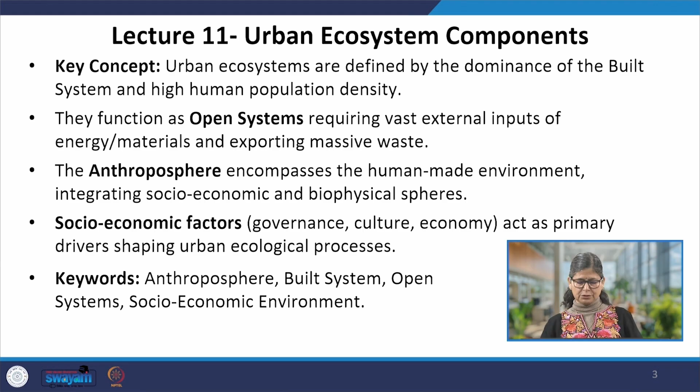Socioeconomic factors we discussed, governance, culture, economy, act as prime drivers shaping the urban ecological processes. Keywords of this lecture were anthroposphere, built system, open system, socioeconomic environment. In the following lecture, urban ecosystem functions and processes, we explored.

Key concepts were urban functions are hybrid, combining natural capital with human-derived assets like technology and infrastructure. Resource import creates an artificial trophic web, decoupling the city from the local primary production. It's a new one. Information flow via digital and social networks acts as the neural network, regulating feedback in the

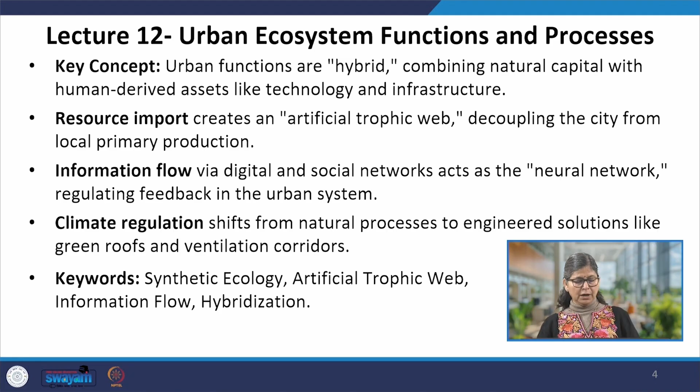urban ecosystem. Climate regulation shifts from natural processes to engineered solutions like green roofs and ventilation corridors. The keywords were synthetic ecology, artificial trophic web, information flow, hybridization. Next lecture was on urban metabolism, which is a very important one.

Its concept is analyzing cities as organisms that consume resources and excrete waste. Abel Wolman in 1965 formalized the concept using an input-output model to quantify urban resource flows. The goal is to shift from a linear metabolism, take, make, waste, to a circular metabolism. Once we understand what is going in the waste, we can recycle and reuse that.

Tools like material flow analysis account for the mass balance of inputs, stocks, and outputs in a city. Urban metabolism, Abel Wolman, material flow analysis, and the circular economy were the keywords for this lecture.

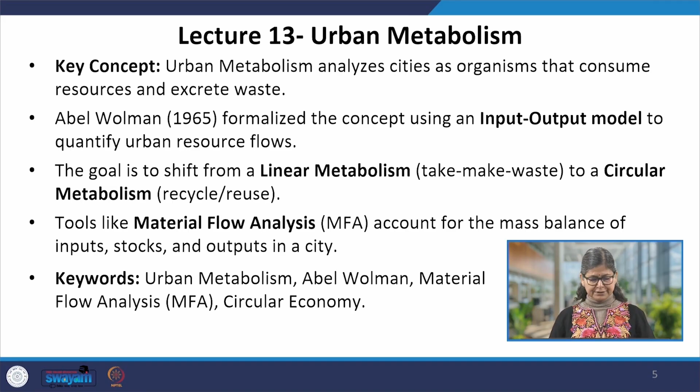Urban ecosystem and water, lecture 14, talked about the key concept of urbanization, which creates an engineered water cycle, and that is fundamentally altering the natural hydrology. Impervious surfaces drastically reduce infiltration and increase surface runoff, leading to flashy hydrographs. We discussed those hydrographs as well.

The urban stream syndrome describes the ecological degradation of waterways due to increased runoff velocity and pollution. First flush phenomena washes concentrated pollutants, oil, metals, etc. from the surfaces into water bodies during the storm. Keywords chosen were urban hydrograph, impervious surfaces, urban stream syndrome, first flush.

Lecture 15, the last lecture of that particular module, was demonstration of urban ecosystem and water. Achieving water security requires non-conventional resources and an integrated urban water management approach. That was the key concept. We discussed ice stupas in Ladakh, fog harvesting, Singapore's NEWater. And the key words were desalination, NEWater, fog harvesting, ice stupas, and definitely integrated urban water management.

So today we'll be covering the case study on BGI solutions, and for that the flow will be from concept to capability, global benchmarks, the Indian context, synthesis and scaling. The 5 capabilities: measure, sensing, which we discussed in lecture 53. Regenerate, eco-engineering. Design wisely, best management practices. Manage risk, planning, and scale responsibly, which we will be discussing in this lecture.

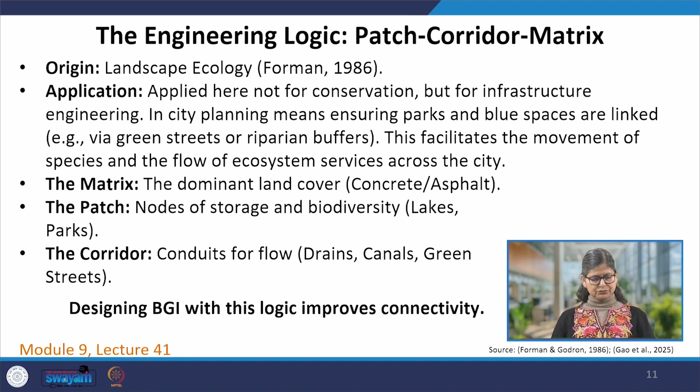That facilitates the movement of species and the flow of ecosystem services across the city. The matrix, the dominant land cover; the patch, nodes of storage and biodiversity; and the corridor, conduits of flow: drains, canals, green streets. So, designing BGI with this logic improves connectivity. We discussed it, introduced it also in lecture 41.

Redefining PCM in the context of the future urban ecosystem, these elements take on specific engineering definitions. The matrix, the background fabric that controls flows of energy and matter. Urban reality: the matrix is hostile, impervious, a heat island generator. So, how to really change that matrix? The patches, the non-linear surfaces that differ from the surrounding matrix. In a BGI network, patches function as nodes or capacitors.

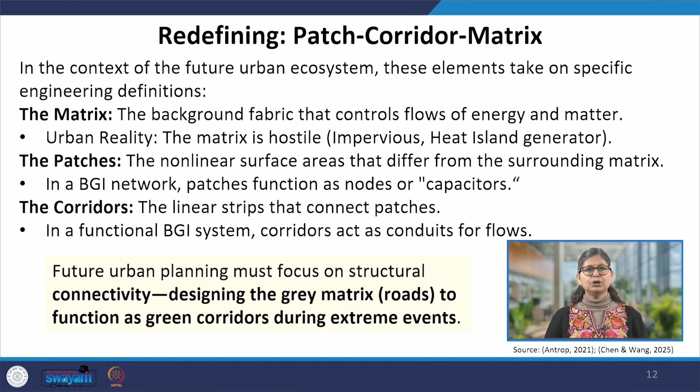The corridors, the linear strips that connect patches. In a functional BGI system, corridors act as conduits for flows. Future urban planning must focus on structural connectivity, designing the grey matrix like roads to function as green corridors during extreme events. Hybrid grey-green structure: the false binary is it's either grey or green. No, it has to be grey and green.

Complementarity. The green manages high frequency, low intensity events, 90% of the rain events, and polishes the water quality, whereas the grey will manage the low frequency, high intensity events, cloudburst-like things, and conveys the volume. The performance metrics has to be different.

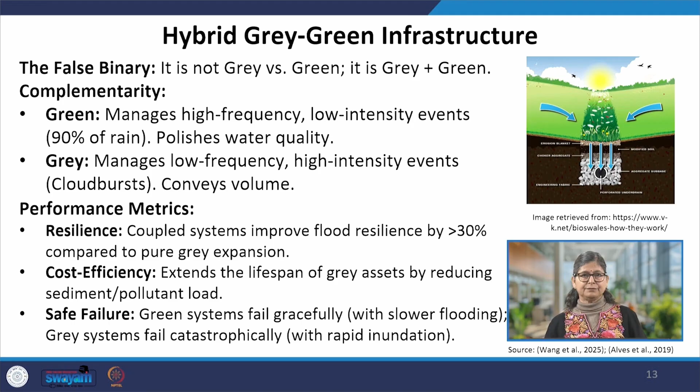Resilience. Coupled systems improve flood resilience by more than 30% compared to pure grey expansion. Cost efficiency: it extends the lifespan of grey assets by reducing sediment or pollutant load. Safe failure: green systems fail gracefully with slower flooding, whereas grey systems will fail catastrophically with rapid inundation. Global benchmarks: operationalizing this resilience at scale.

Copenhagen, we will see very good examples here, the hydraulic city. The triggering event was in July 2011, a cloudburst, 1000-year storm event, 150 mm rain in 2 hours. The existing grey infrastructure, a combined sewer system designed for historical rainfall patterns, was overwhelmed. Sewage-contaminated water flooded cellars and streets, causing over €1 billion in direct damages.

This event was the tipping point that forced the utility and the municipality to acknowledge that the pipe-bound paradigm was fiscally and physically impossible to scale to meet climate change projections. So, what have they brought? Technical solutions: cloudburst boulevard. The concept is to redesign roads to act as V-profile canals during extreme rain. Now the road network, the matrix, functions as a surface hydraulic channel.

You just see now the crown is here. But what is being advised now is, okay, let us go for a channel. The dip is here. So high curbs, reversed crown profile, channels water away from basements to the harbor or lakes. So this entire road will actually act like a drain.

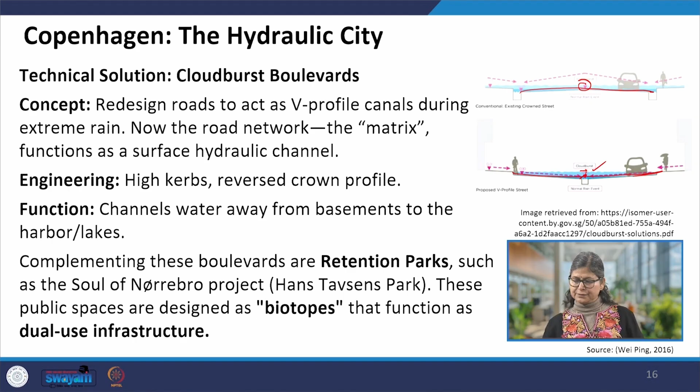Complementing these boulevards are retention parks such as the Soul of Nørrebro project and Hans Tavsens Park. These public spaces are designed as biotopes that function as dual-use infrastructure. So, in Copenhagen, we can see also the change in governance, the Copenhagen formula. Prior to 2011, Danish law prohibited water utility companies from investing in surface projects. They could only spend collected tariffs on subsurface pipes.

This created a funding silo where the utility had money but no mandate for green solutions, while the municipality had the mandate for green solutions but no money. So, the innovation was legislative change, which allowed the utility to fund surface projects if cheaper than pipe expansion. Financials: this grey-green solution versus the grey solution has been a really good shift in the governance. And net benefit, Danish kroner 5 billion over 100 years. That's the net benefit expected out of this paradigm shift.

Singapore, the biophilic city, every time we come back to these examples: ABC, Active, Beautiful, Clean. Singapore's primary driver is water security. Every drop of rain is a resource that must be captured and cleaned for reuse because they don't have any other natural sources of water. Treating the entire island as catchment is the scale.

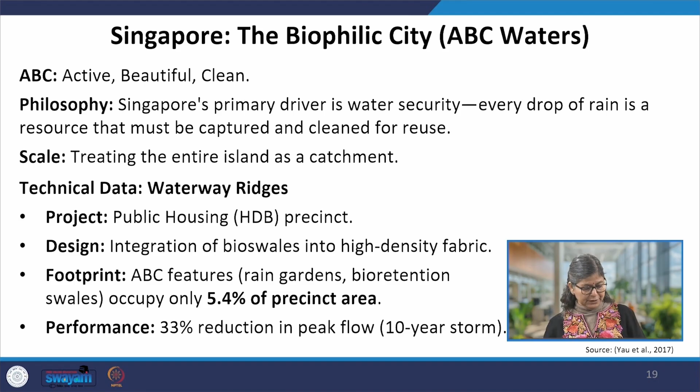The ABC guidelines provide detailed engineering specifications that rival standard civil engineering codes. So, this is a very strong contribution of this project. For bioretention soils, the guidelines specify a precise cross-section consisting of a surface vegetation layer to slow velocity, a filtration media, sandy loam with high hydraulic conductivity to strip pollutants, and a transition layer leading to a gravel drainage layer at

the bottom. Cleansing biotopes: these features use specific macrophytes, wetland plants, selected for their ability to absorb nitrates and phosphates. This is critical because Singapore captures urban runoff for its reservoirs. The beautiful component is a functional water treatment facility.

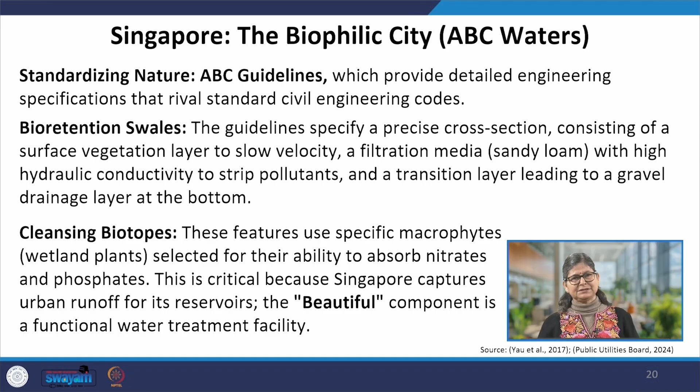The Indian context: the context matters. Hydroclimatically, Indian cities face the monsoon pulse, intense short-duration rainfall, often exceeding 100 mm per hour, which, as we have seen in the case of Copenhagen, is not really happening like that. And this monsoon pulse is followed by long scorching dry spells. BGI systems in India must therefore be amphibious. They must survive drought conditions for 8 months while managing torrential floods for 4 months.

So, the high-density matrix plus encroached corridors, slums, informal settlements. That is the spatial challenge. Scaling BGI in India involves navigating complex issues of land tenure, displacement, and social equity. Fragmented governance.

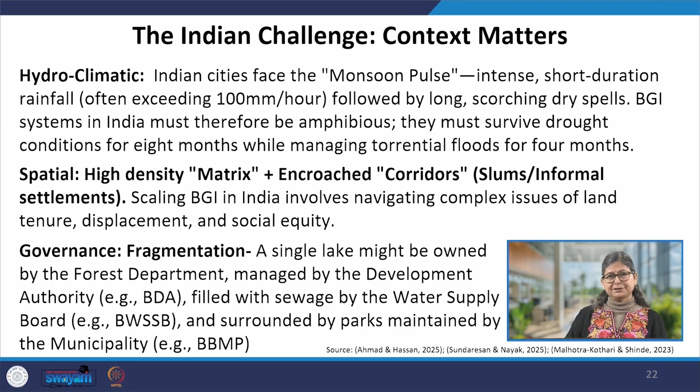A single lake might be owned by the forest department, managed by development authorities like the Bengaluru Development Authority, filled with sewage by the water supply board, the Bengaluru Water Supply Board, and surrounded by parks maintained by the municipality. So many different governance partners there. So, who will take the lead?

First, we'll start with Bengaluru, the Bengaluru lake system. Decentralized governance and networked restoration: cascaded tank systems, which almost all the cities have traditionally enjoyed. Fragmented, sewage-fed, eutrophic, that's the current status of this lake. Integrated wetland model, Jakkur Lake. For Jakkur Lake, that was the model: a 10 MLD STP plus a 7-acre constructed wetland, an algal pond and the main lake. That was the solution side. Tertiary treatment via nature, closing the loop.

Collaborative model, Jalaposhana Trust. The performance and reality check in the case of Jakkur Lake: improved BOD and DO levels. This system has been widely cited as a model for integrated urban water management. A phosphorus balance study was done in 2022, where we could see that it has not really been able to reach its goal. The wetland only removes 12% of the phosphorus. Fugitive emissions, raw sewage bypass and detergents are there. So, a wetland cannot fix a broken sewage network alone.

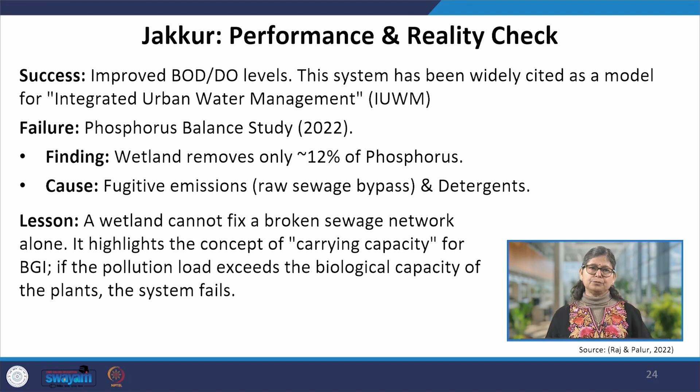It highlights the concept of carrying capacity for BGI. If the pollution load exceeds the biological capacity of the plants, in this particular case a wetland, then the system fails. So we have to also be aware of this carrying capacity. Bengaluru governance, the commons: we will see how the solution came forward. While Jakkur is a technical study, Kaikondrahalli and Puttenahalli are governance studies. They represent the social infrastructure required to maintain BGI.

Kaikondrahalli Lake was restored as a biodiversity hotspot, deliberately avoiding the soup bowl concrete tank design favored by engineers. Interestingly, the design retained dead trees for birds to perch on and maintained shallow mudflats for the waders. The restoration was driven by a partnership between the municipality and a citizen trust. The design features a kalyani, a tank for idol immersion, which separates religious rituals from the main biodiversity zone, demonstrating cultural sensitivity in BGI design.

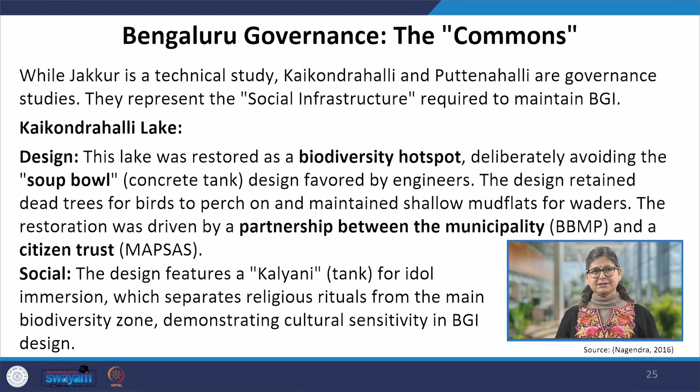Puttenahalli Lake, the commons example. The first official MOU between a citizen trust and the municipality was done for this case, and the lake water level is being maintained using treated apartment wastewater. It effectively closes the water loop at a neighborhood scale, turning wastewater into a resource for ecosystem survival.

Legal fragility: PILs against private management of public assets are there. That's a great challenge, which underscores the need for a formal legal framework for citizen stewardship. The eyes on the street, or in this case, eyes on the lake, are as important as the bunds and sluice gates. So, governance, maintenance, technology, everything matters.

The second case study comes from Chennai. Chennai's oscillation between day zero water scarcity and catastrophic flooding demands a BGI strategy focused intensely on aquifer recharge. The city sits on a unique sandy coastal aquifer system which is currently paved over. Flat coastal terrain, aquifer depletion, and flood and drought oscillation.

So that is the very challenging context for the Chennai city. So the strategy that has been picked up is the pond strategy. And two important interventions will be discussed, the Chitlapakkam and the Kadapakkam lakes.

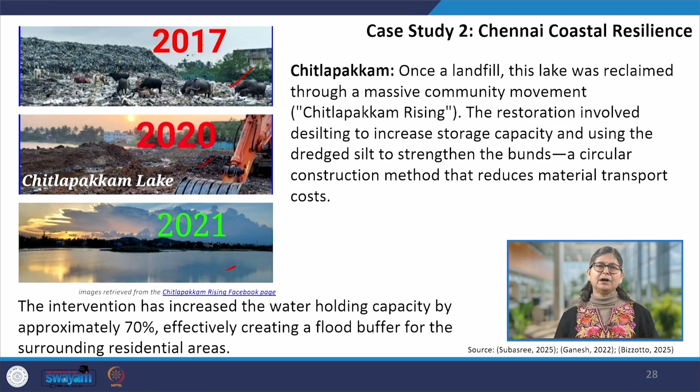So you can see in 2017 the condition, and then it was under work, and now the Chitlapakkam Lake looks like this. The intervention has increased the water holding capacity by almost 70%, effectively creating a flood buffer for the surrounding residential areas.

The other case from Chennai is Kadapakkam. This project pilots the use of nature-based solutions to treat inflows from the industrial Manali area. It integrates sediment traps, floating wetlands, and decentralized wastewater treatment systems (DEWATS) to enhance water quality prior to recharge. It further explores the use of bioswales and septic tank integration.

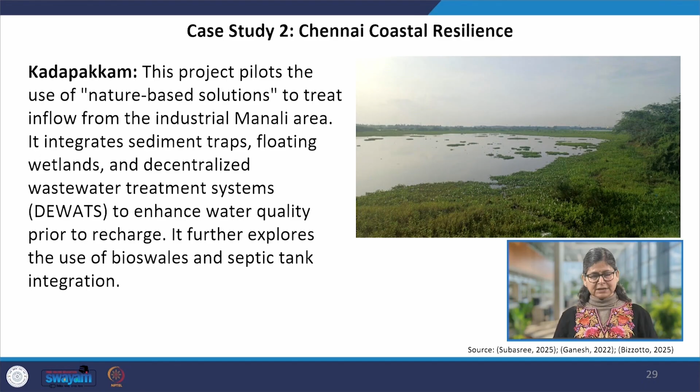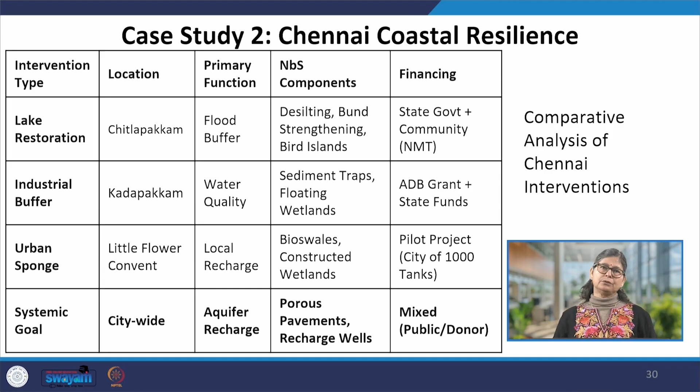So different models which can go with that have been picked up, and we can see the financing has come both from the public and the donor side, private side. So that's the way we can see why this particular coastal resilience mission is going on and accepted by the people.

Synthesis and scaling. Synthesis from project to system. The future urban ecosystem requires shifting from project management to system management. Data driven planning is important because we cannot manage what we cannot measure. Tools like the Climate Smart Cities Assessment Framework and NIUA C-Cube are attempting to create a data baseline for Indian cities. The framework tracks indicators such as percentage of green cover and water body rejuvenation. This data layer is the first step in moving from ad hoc projects to measured performance.

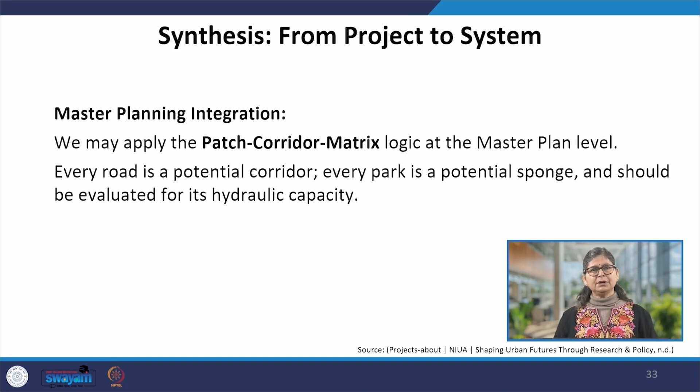Master planning integration is the next step from project to system. If you have to move, master planning integration is a compulsory layer. We may apply the PCM logic at the master plan level. Every road is a potential corridor. Every park is a potential sponge and should be evaluated for its hydraulic capacity.

Financing the future becomes critical because this is a barrier in India for BGI, not only for creation but also for operation and maintenance. The capex trap. Most Indian central schemes like AMRUT 1.0 funded capital expenditure but left operation and maintenance to financially weak municipalities. The result is built-then-abandoned infrastructure. Silted bioswales and clogged drains.

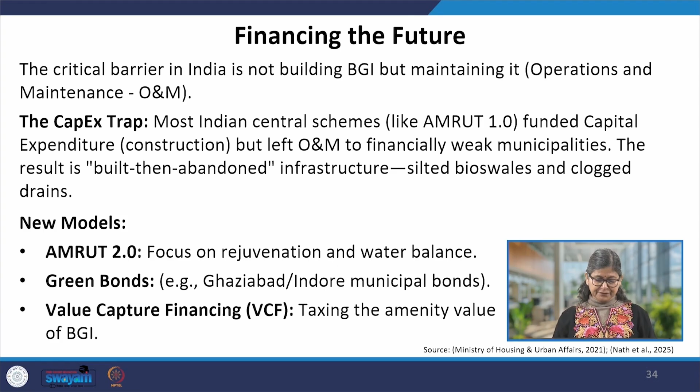New models: AMRUT 2.0 is actually focusing on rejuvenation and water balance. Green bonds, value capture financing, taxing the amenity value of BGI.

Governance models for scaling. State-led, high-capacity, rigid, like the Copenhagen model, can be looked at. Precinct regulation, developer-driven, the Singapore ABC guidelines. Citizen partnership, fragile but inclusive. In the Bengaluru case, we have seen that. Ecological authority, statutory protection, that is the East Kolkata wetland.

Future governance requires interdepartmental committees and/or dedicated blue-green authorities, but with stronger enforcement powers that have jurisdiction over the entire hydrological cycle. So the flexibility also has to be drawn from the context of that city and the challenge. India needs a hybrid model, statutory enforcement with community stewardship.

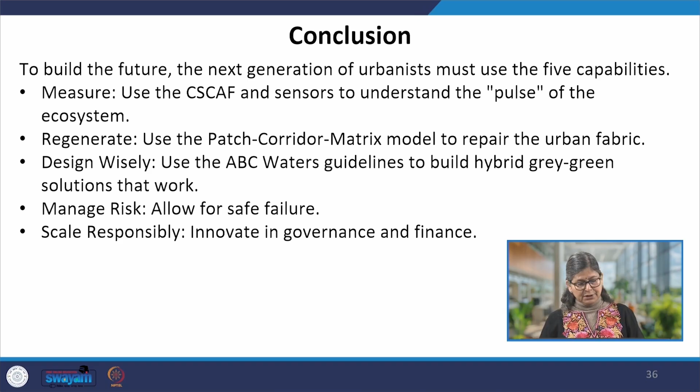So we can conclude this future of the ecosystem: to build the future, the next generation of urbanists must use five capabilities. Measure: use the CSCAF, the climate smart cities framework, and sensors to understand the pulse of the ecosystem. Regenerate: use the PCM model to repair the urban fabric. Design wisely: use the ABC Waters guidelines to build hybrid grey-green solutions that work. Manage risk: allow for safe failure. Scale responsibly: innovate in governance and finance.